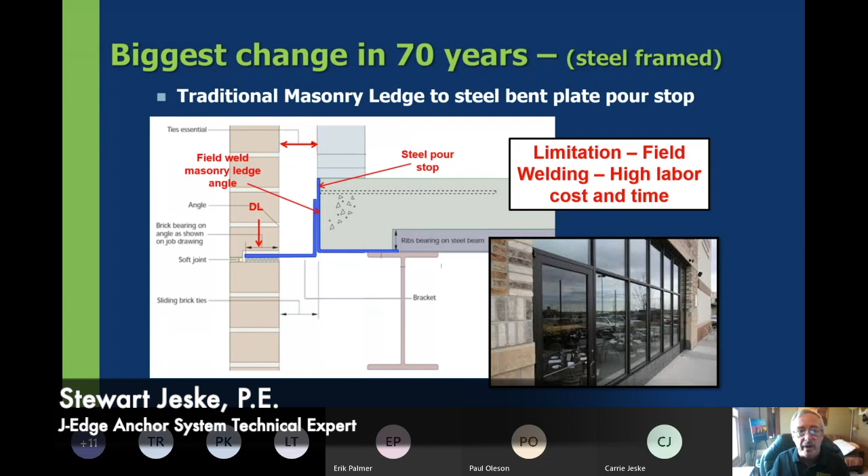We're going to cover some very important information about the biggest change in 70 years to traditional facades and how they're attached onto steel framed buildings. We're not talking about concrete frame buildings, but specifically steel frame buildings. This is something that has been developed just within the past year.

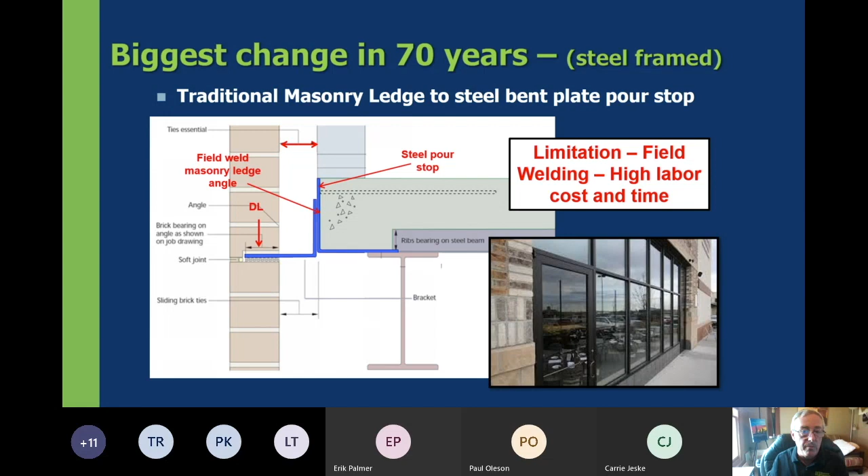Here we see some of the traditional support for a masonry facade, including a brick ledge that has been designed to be field welded onto the steel bent plate pour stop. The limitation here is that it requires a high degree of field welding, which means high labor, cost, and time associated with the project.

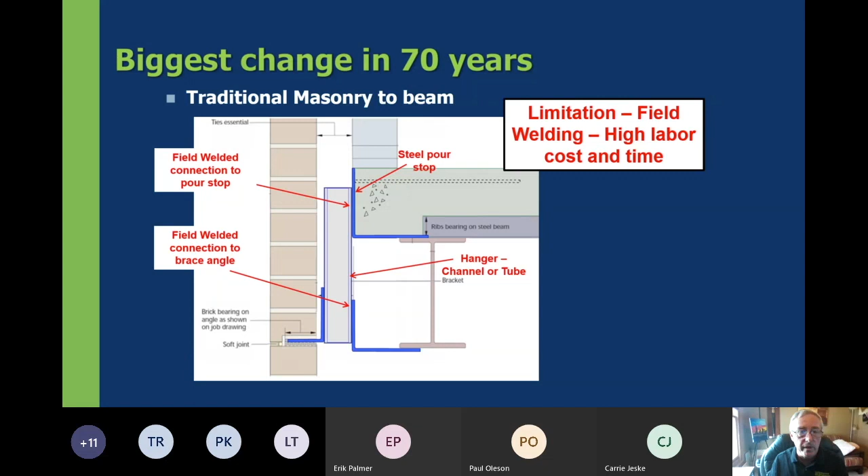More often you might see a detail like this, which includes a hanger to a brick ledge. Again, this still requires field welding onto the steel pour stop, which requires a lot of time and cost.

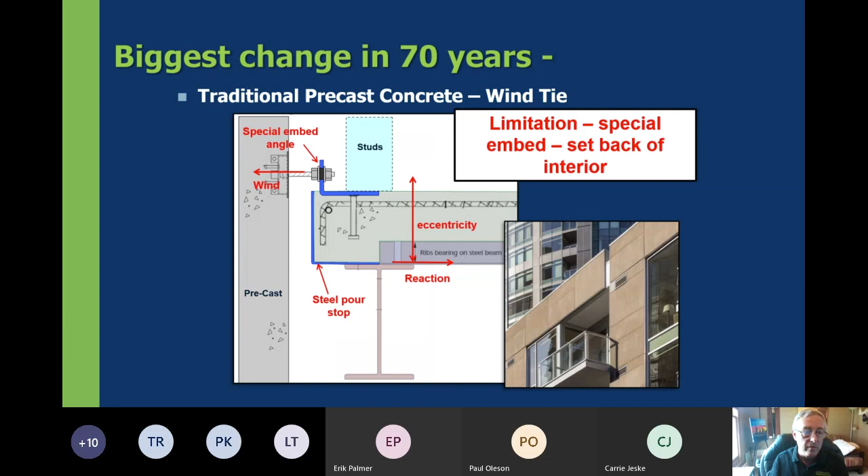Traditional precast concrete support looks something like this, where we have a steel beam and that steel pour stop, but we have to have an embed usually in the top of the slab, and that embed with anchors needs to develop the loads seen from that precast. Usually this involves a setback, or real estate setback, so that the studs stay out of the way of these anchor systems. So there's a loss of real estate, and there's the cost of the embed associated with this traditional precast support.

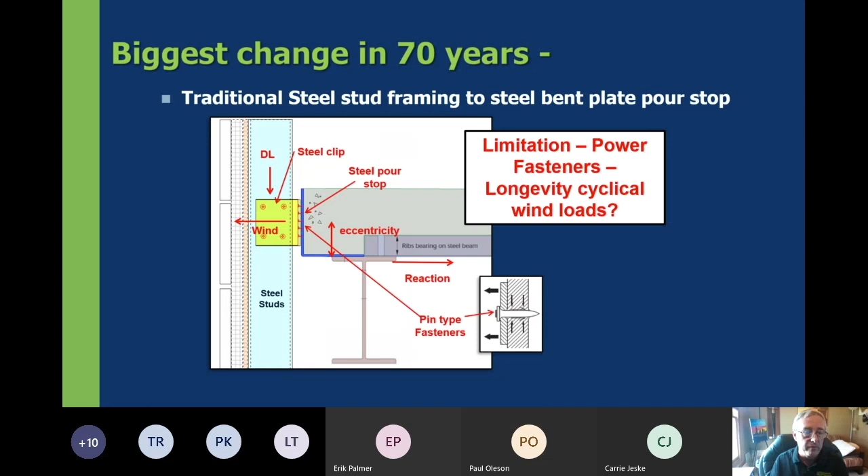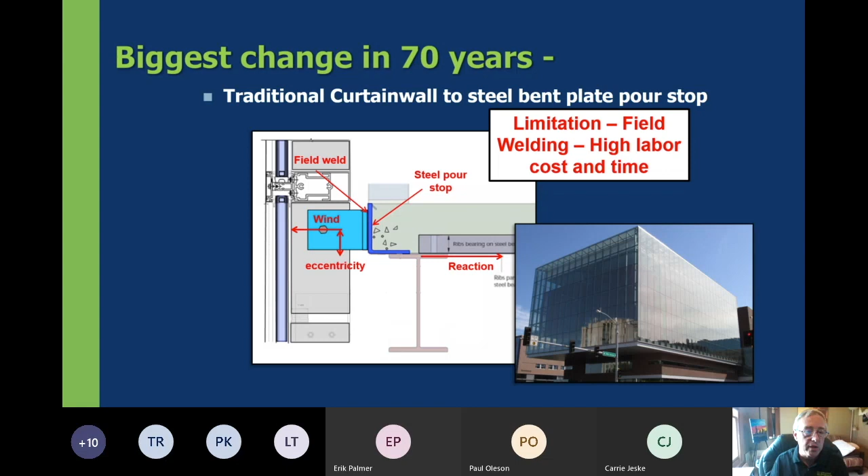Traditional curtain wall support for the past 70 years or so has been something like this, where we have the bent plate on the beam, and it is welded. A typical tab or anchor connection is welded to that bent plate. Every once in a while, we see curtain wall that needs to have some type of an embed put into it associated with steel framing design.

The problems with this are that there's a limited amount of room in the lightweight concrete to be able to develop the loads back into the concrete edge for the curtain wall loads. And so this becomes very difficult.

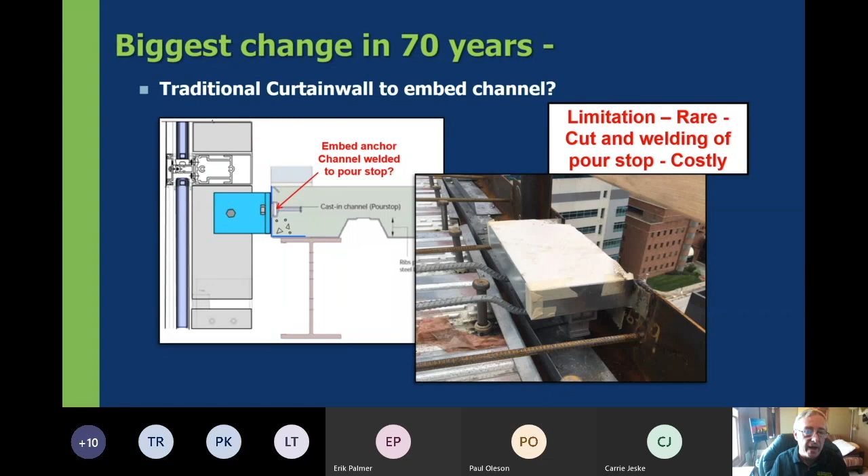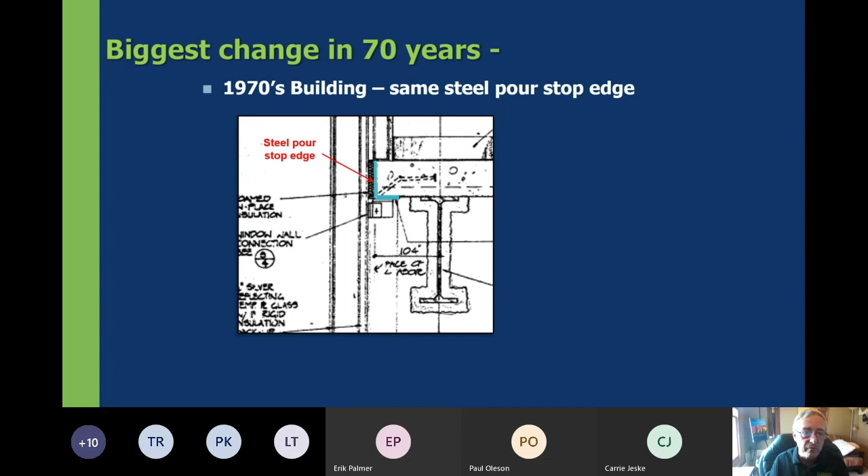So for the past 70 years, we have seen the same deal where we're working around this bent plate. In this instance, this is not 70 years ago, but it's in the 1970s, in Kansas City. It includes a bent plate pour stop, and some type of developed anchor back into the concrete, and you can see the clips for the curtain wall support, welded off to the underside of that bent plate pour stop.

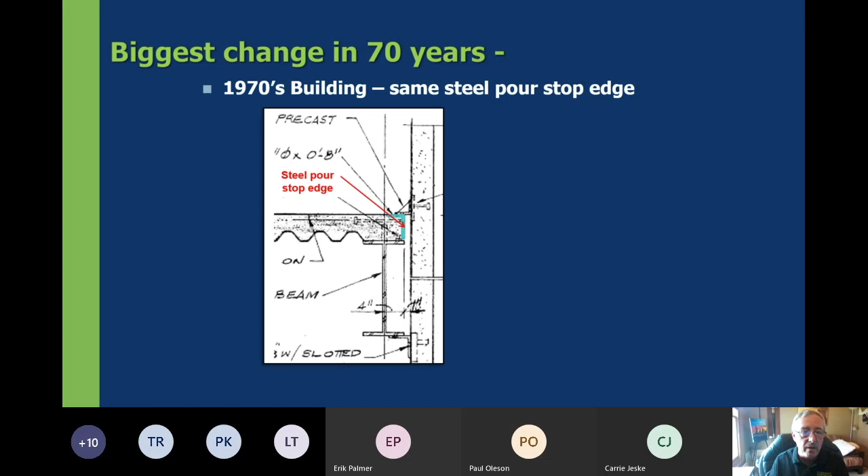Here's another one that's in Kansas City, Kansas. It's a headquarters for the city, and this is precast, so we can see that precast anchor that sits on top of it, welded off to the bent plate pour stop, and that bent plate pour stop has some type of anchor system to try to develop the loads back into the concrete. Probably back then, they weren't using lightweight concrete; they were probably using a heavier weight concrete to develop the loads.

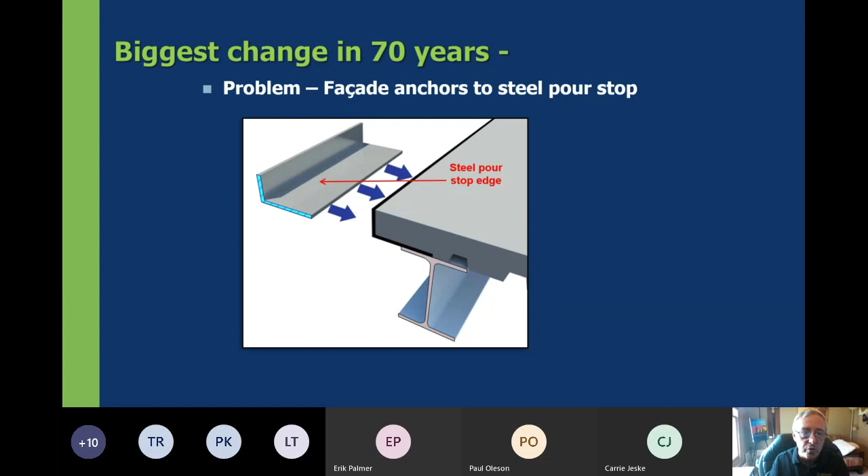The problem of the past 70 years has been that we're working connections around this steel bent plate pour stop that has been in place. Somehow we have to get the loads past the bent plate, or through the bent plate, or around the bent plate, to be able to get it into the building structure. And that's kind of where this idea has come from and generated.

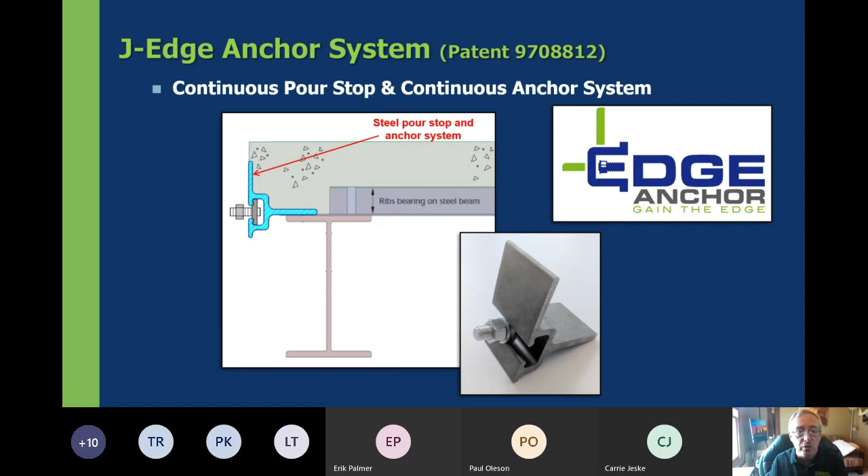It's a continuous pour stop and continuous anchor system attached directly onto the structural steel so that it performs two functions at one time. There's a lot of advantages associated with this, but the idea came about by asking glazing contractors what their number one problem in the field was. Almost to a T, they'd say welding these anchor plates, these anchor clips, onto the side of the bent plate pour stop. So that developed into a continuous pour stop and anchor system.

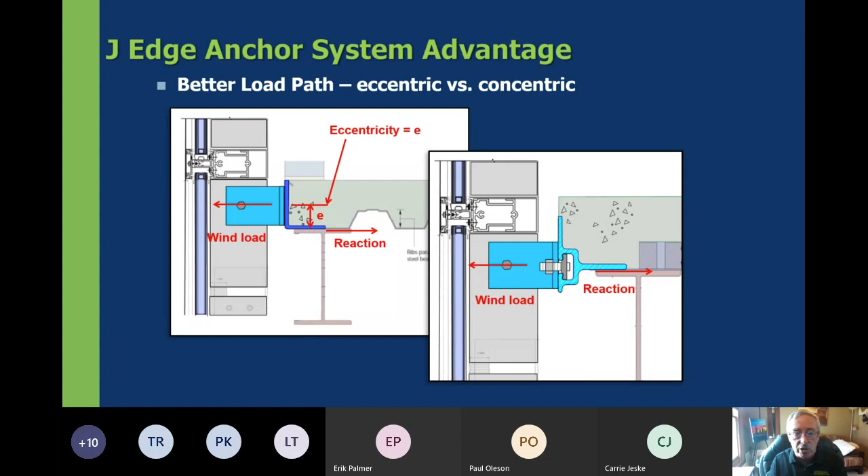Here are some advantages of this new type of pour stop and anchor system. It is better structurally, offering a better load path into the building structural system. It's concentric versus eccentric, which is associated with the typical traditional bent plate. There's an eccentricity from welding onto the side of the bent plate that wants to bend that pour stop outward. That's avoided in this concentric connection associated with the J-edge anchor system, making it structurally better.

In fact, the better load path equals about a 150% increase in load capacity structurally.

Now, not only that, but we have stronger steel. Whenever these are extruded, they're extruded out of a large billet steel, and it comes out at a 60 KSI or better yield strength, versus a 36 KSI yield strength for the traditional bent plate pour stop. That's about a 60% overall increase. So when you add those two together, we're over 200% increase in structural capacity for carrying facade loads over the traditional bent plate pour stop. So it's better structurally.

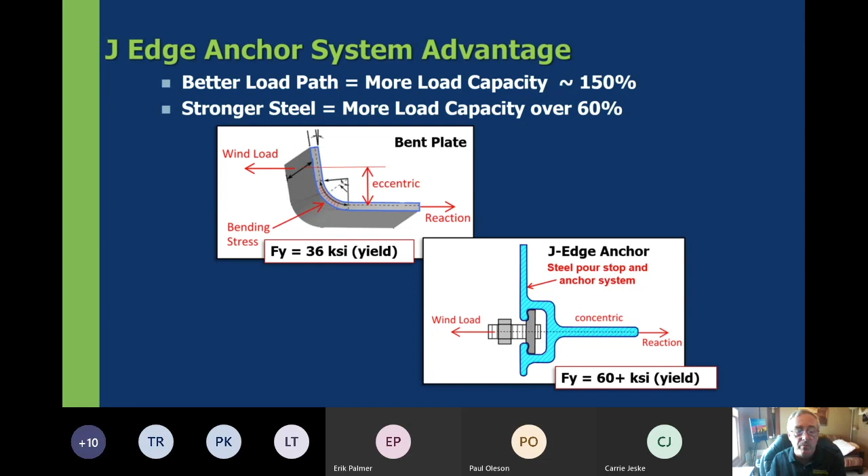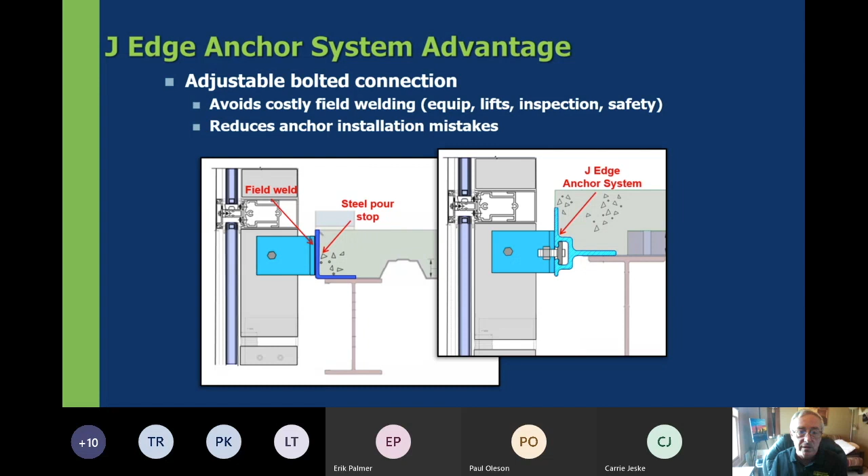Some of the other system advantages are it offers an adjustable bolted connection that avoids costly field welding, and it also reduces anchor installation mistakes. I talked to a glazing contractor who said that almost every single one of their clip angles got installed in the wrong position, and they had to undo and re-weld, essentially cut away these clips and re-weld them onto the bent plate pour stop. Those types of mistakes are avoided with this adjustable system that's continuous along the exterior of the building.

In addition, this new system reduces the overall construction schedule. We interviewed many glazing contractors, and they estimate about 15 minutes per clip angle, and a mullion has two of these clip angles, one on each side. So you can see that's 30 minutes for construction of each mullion around the edge of your facade system attached to the bent plate pour stop.

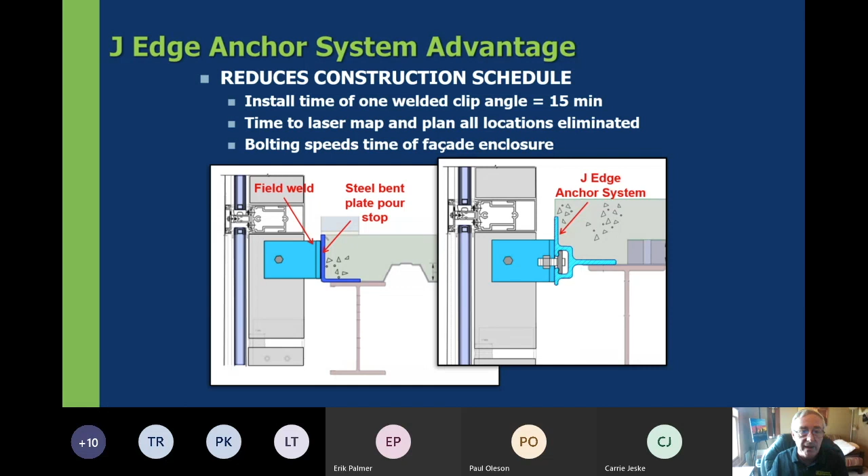This bolted system greatly reduces that install time down to where you can finish up several of these in 30 minutes. In fact, one glazing contractor estimated—and we've got a video of them up on the website—that about 20 of these can be installed in the time it takes to install one of the traditional ones. So the bolting of this connection speeds the time of facade enclosure.

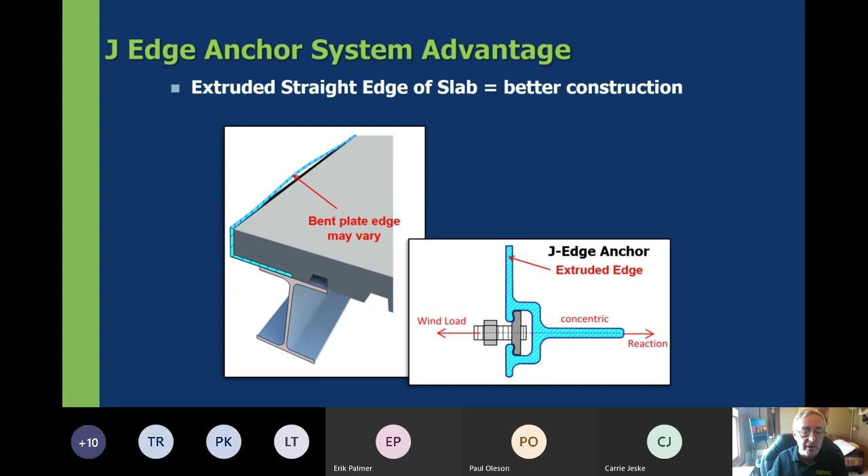Another system advantage is it's a true straight edge of slab, versus the wavy bent plate we have complaints about from many glazing contractors. This plate, when it gets bent in the shop, isn't held to a very high tolerance. It's got a lot of wave in and out of the building, so there's a lot of accommodations glazing contractors have to make for this wavy bent plate. Not so with the J-edge anchor system—it's virtually very straight, and it's welded onto the structural steel, so it's high tolerance.

Another advantage is associated with the safety railing during construction—I'm sure all of you would be interested in this. This is a typical construction safety railing we might see for the traditional bent plate, where it gets installed and welded off, and an angle riser gets welded off to the inside of the bent plate pour stop. What happens to those after we have the concrete in place? Essentially it's wasted—they have to cut that off at the slab level, wasting material. In addition, where you cut this off at the slab level, it creates a nice intrusion into the slab where cracks may originate from.

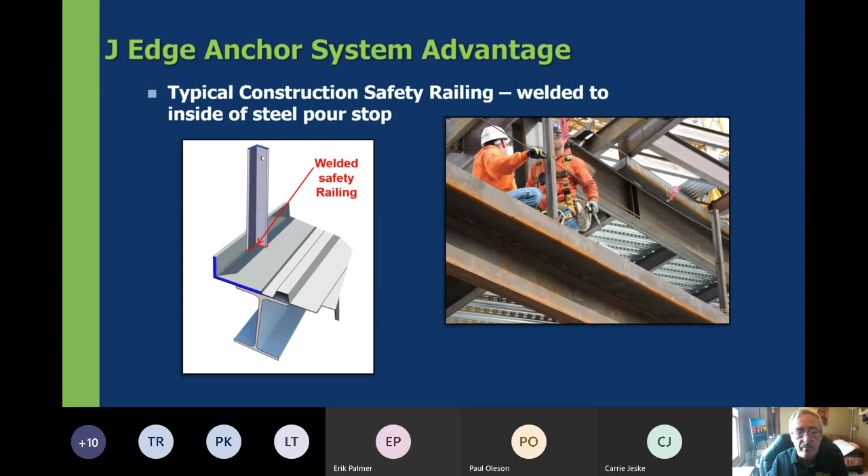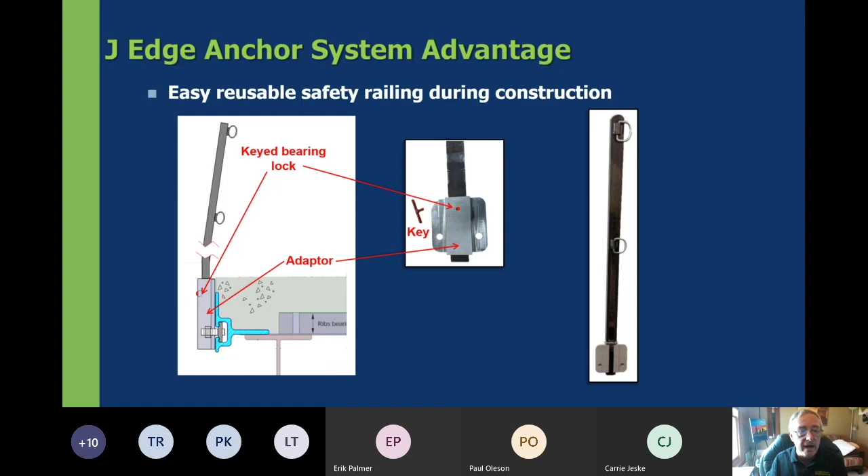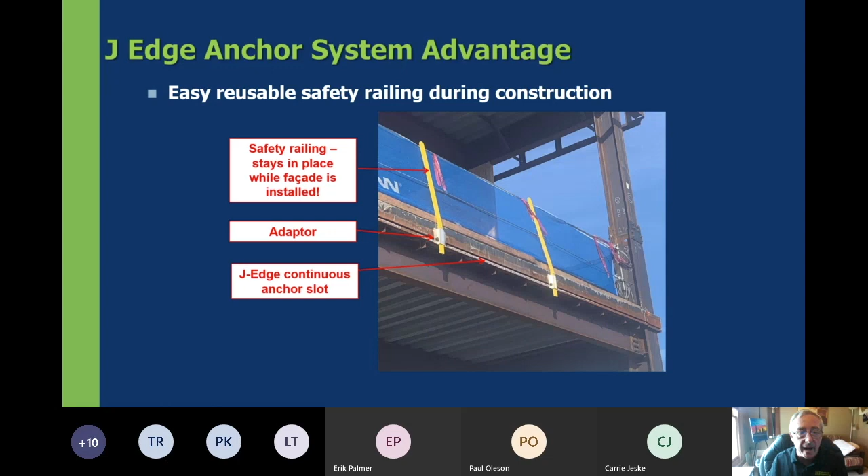So we've developed an accommodation for a reusable safety railing associated with the J-edge anchor system. It's a bolted system with a keyed bearing lock and an adapter. It actually looks like this on the construction on the outside of the building—you can see those bent back into the plane of the interior of the building, and you can see the adapter there. The safety railing stays in place while the facade is installed, and that's the reason for the bend, because you can actually install the facade over that. You can see the J-edge anchor system there, that line that goes through—that's where the actual toggle bolts fit into.

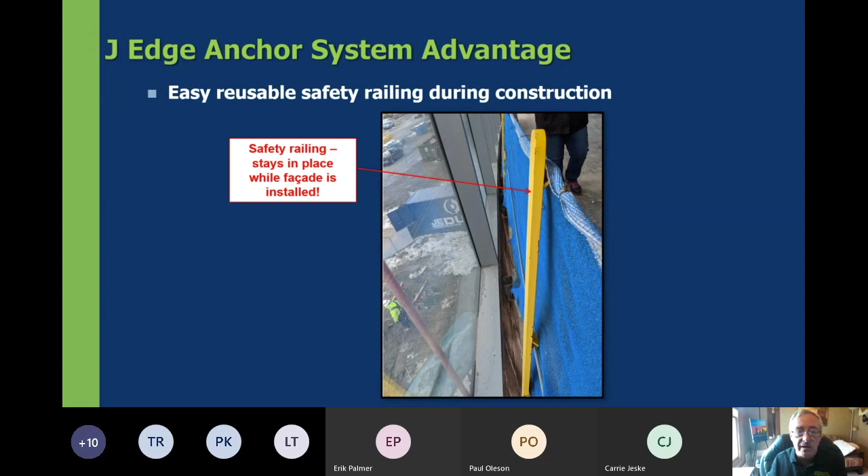Here's another view of the inside after we get curtain wall installed over it. This safety railing stays in place and can be removed at a later date really easily. There's just a bolted system on the sides of this, so it can be removed by hand.

Another advantage we see is the ease of temporary construction enclosure. Using that same adapter system with some posts and a temporary fabric enclosure, we can quickly enclose the building structure to control the environment on the inside.

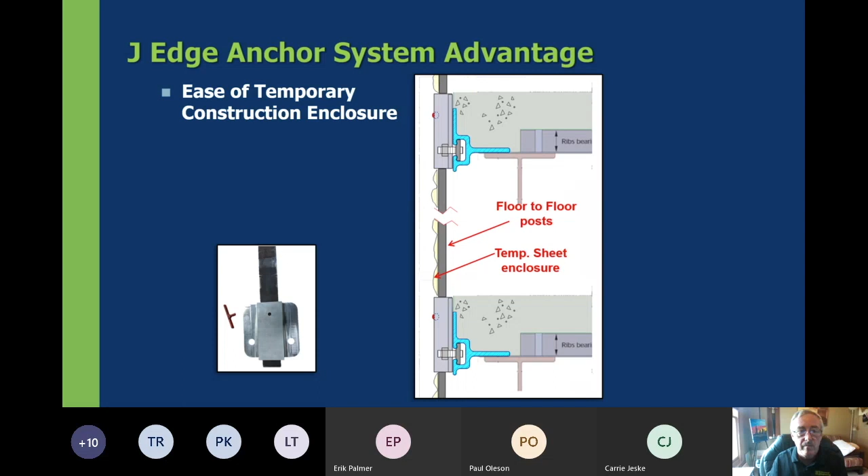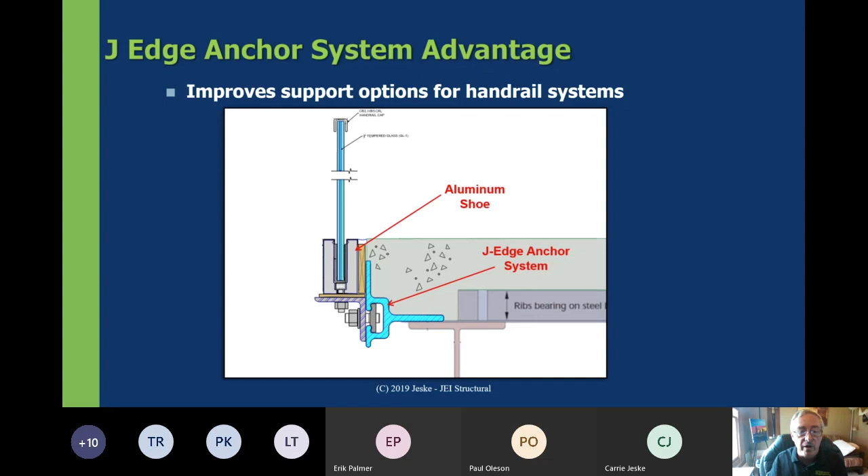Another system advantage would be handrail mounting, for both exterior and interior use. It's a very quick and easy system to be able to mount that handrail.

One of the additional benefits may be an increased thermal break, reducing the conductance from the outer parts of the curtain wall into the interior of the building.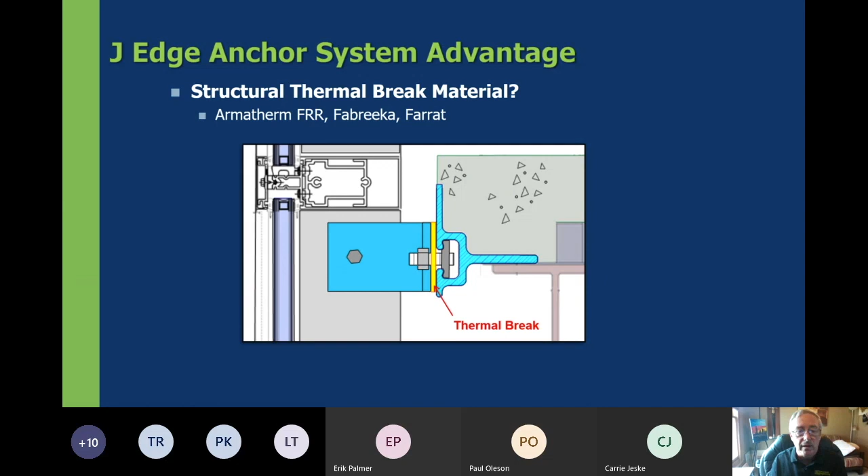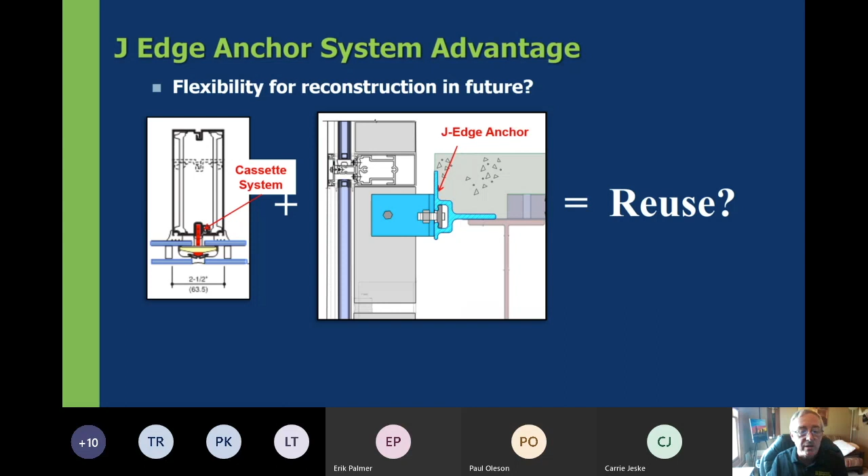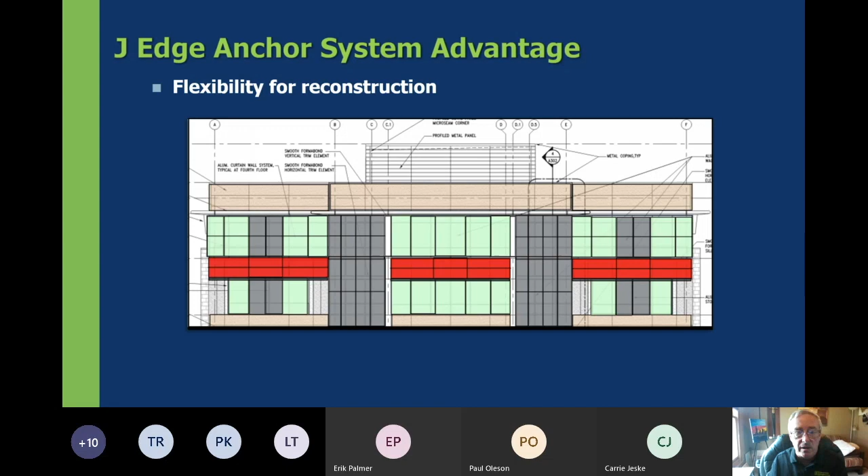Another possible benefit: many curtain wall systems are starting to go to a cassette system, meaning they have a toggle that allows replacement of SSG glass. This toggle locks in place and holds the glazing in a pocket like this. When this cassette system with toggles is combined with the J-edge anchor system, it may allow reuse of the systems, going from something like this for a facade exterior to something like this in the future. There may be a lot of reuse gained in future renovations of exterior facades with this type of J-edge anchor system.

It also improves performance and attachment of other facade systems. In the case of precast, we're looking at something like this on the front side of the slab edge, instead of the traditional precast support where we lost real estate. This one requires a setback to the real estate, stud construction, and an embed with development of the loads back into the slab.

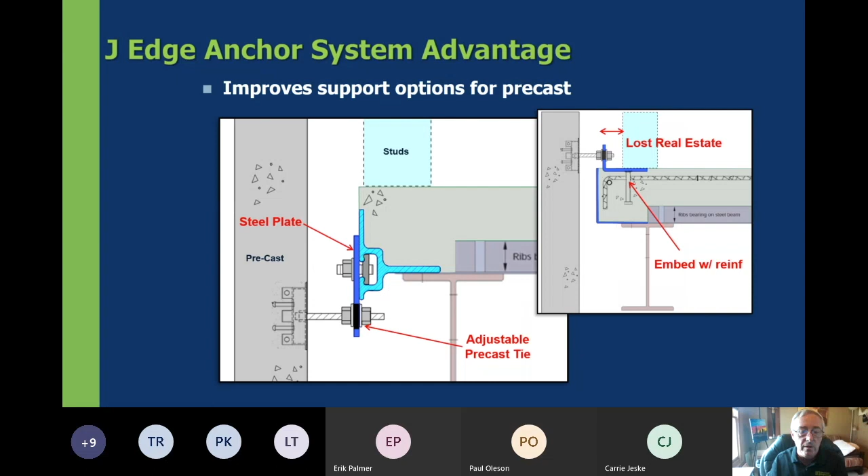More likely, we might see something like this, an underhung connection for precast off of the J-edge anchor system. Again, you don't lose the real estate that you would before for precast.

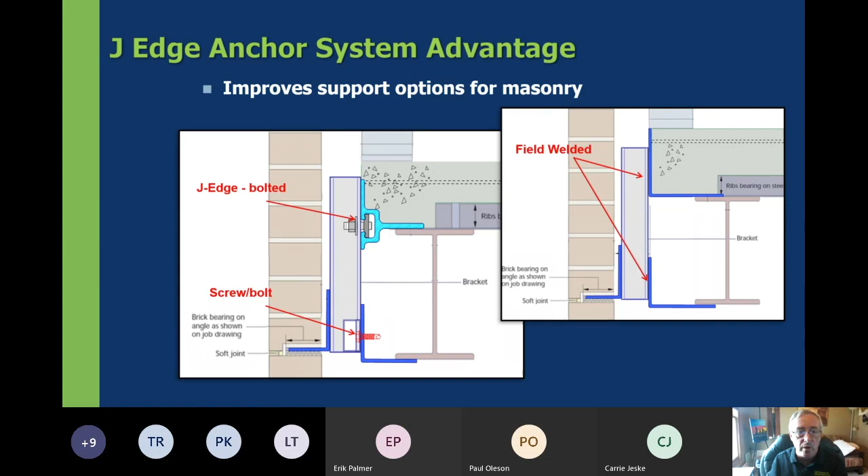For masonry, we might see something like this associated with a bolted system to support a ledger angle, or more likely a hanger system bolted off of the J-edge anchor system with a ledge supported on the outboard side.

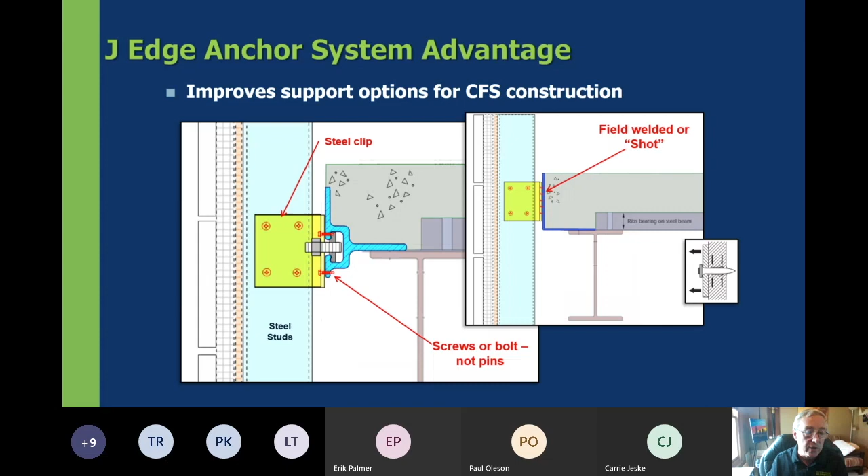For cold form steel framing and lightweight facades, we're typically talking about pin fasteners shot into the bent plate pour stop, or field welding associated with tabs up at the bent plate. Now we can talk about a bolted system, or even shooting fasteners in place, with some air gap in the back that won't reject the pins or screws. So this could actually be attached with screws or bolts.

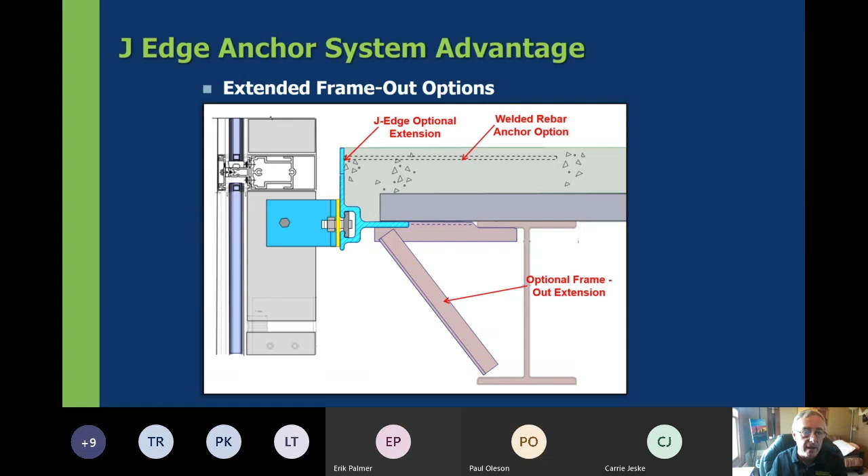We have some options developed on previous projects associated with setbacks, where the beam is set back from the exterior plane of the building. This would involve frame-outs associated with that, optional anchor bars for the J-edge anchor system, and an optional extension to accommodate any slab depth for lightweight concrete slabs.

Here's the biggest advantage associated with the J-edge anchor system: is the cost better? The cost is better and has proven itself out. The increased cost of the part is typically less than the deducts you'd get from eliminating field welding of various facades in favor of bolting.

Here's a real example: a medium-sized office building, 7 floors, in Kansas City, Missouri. The increase in cost for the J-edge versus the bent plate that was already planned was $92,000. The deducts seen from the curtain wall installation, since they didn't have to weld onto the sides of the bent plate, was $200,000. That's a savings of $108,000 for that 7-story building.

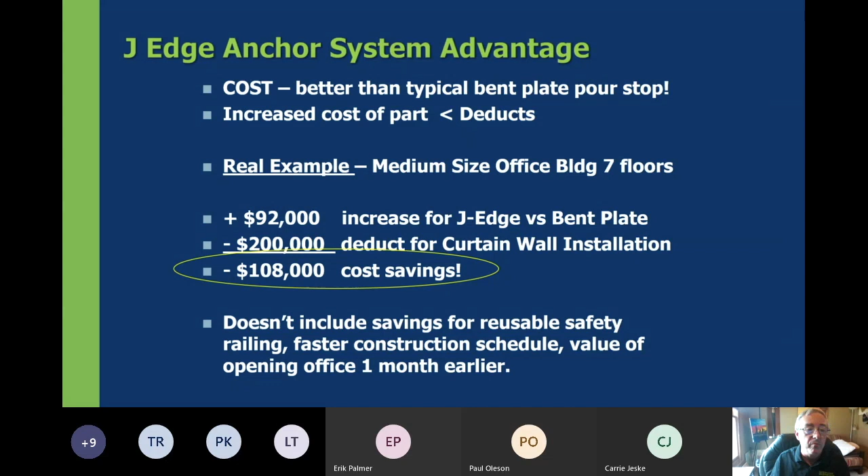Now, this doesn't include savings for reusable safety railings, the faster construction schedule, or the value of potentially opening an office one month earlier.

We've done lots and lots of engineering analysis associated with this from development up till now, and we actually get into analysis of different configurations when people want to see if it applies to their building. We're available to do that.

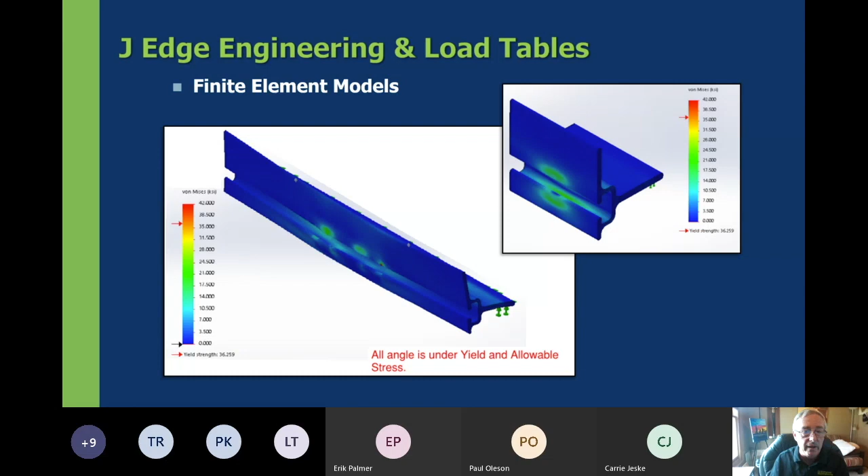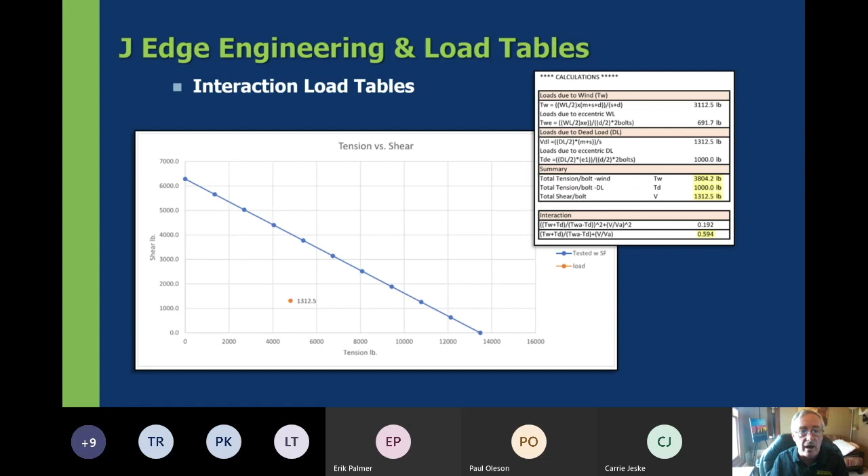We've actually done a lot of testing associated with this, and you can see the testing we've done. From that testing and the design calculations, we've been able to produce engineering load tables, interaction load tables, where we can see the loads for the facade attachment, and in this case we're well below the allowable design load for the J-edge anchor system.

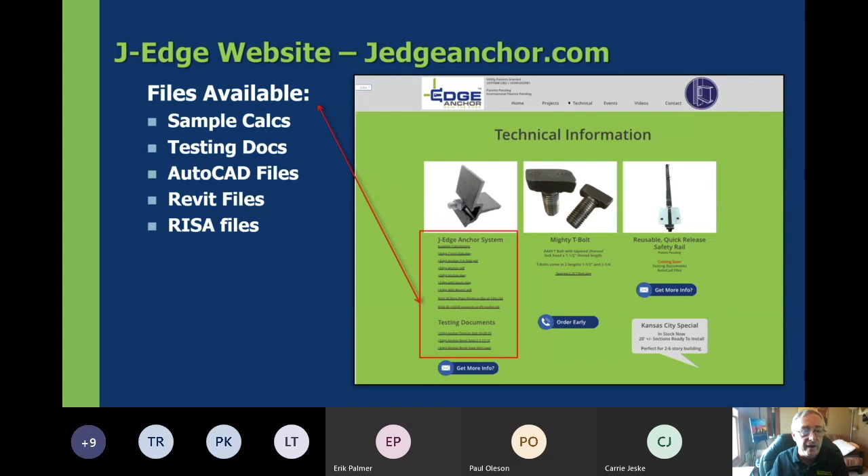Our website has a lot of information available, including sample calculations we've done comparing a bent plate pour stop with the J-edge anchor system. It includes testing documents, which we briefly touched on but are very detailed, AutoCAD files, Revit files, RISA files, and a gallery of videos covering a lot of different subjects and questions associated with the J-edge anchor system.

So to summarize, we've covered a lot associated with delegated structural design. We covered the building structural movement issue that is typically overlooked in manufactured type systems, and we've also covered one of the great changes, I believe, in the last 70 years associated with facade connection.

This facade connection has better structural capacity. It has advantages for construction, a faster construction schedule, and it saves on construction cost.

We have early-on review testimonials that are great: J.E. Dunn, McCown Gordon, Turner. We also have it under construction on several projects, most notably the Microsoft campus headquarters up in Redmond, Washington, which is currently in progress. We have others that are in the design stages around the Kansas City and Midwest region.